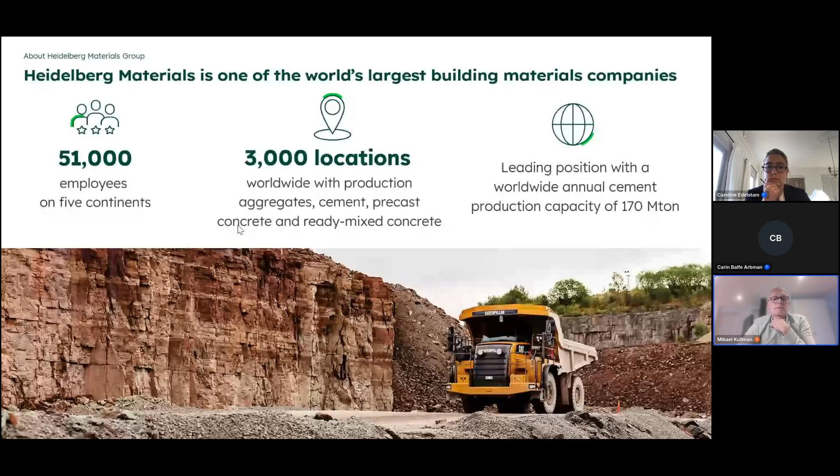As I said, we are working all over the world, but when it comes to Northern Europe, which is the area I belong to, we have activities in Norway, Sweden, and Denmark, the Scandinavian countries, including Iceland, but also the Baltic states. And when it comes to cement production, we have 4 production plants, 2 in Sweden and 2 in Norway, with a total cement production capacity of more than 4.5 million tons per year. But in my presentation here, I will actually focus on 2 locations.

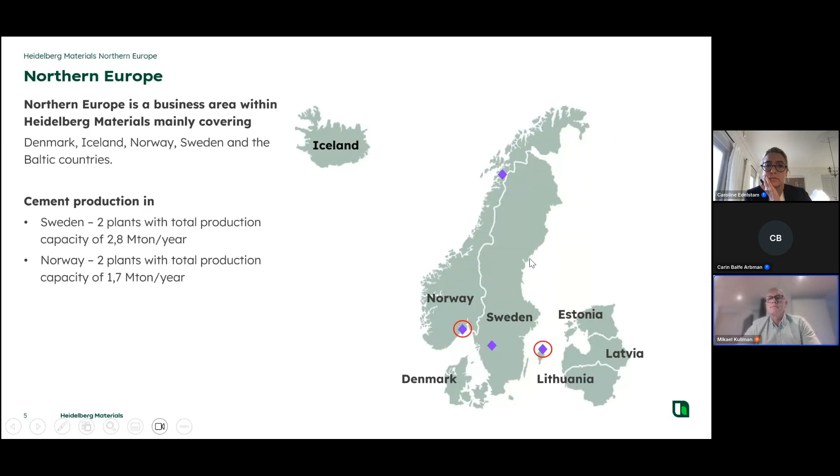One is in the Baltic Sea, which is Slite on the island of Gotland, that is Sweden. And then it's also in Norway, in Brevik, which is about 150 km south of the capital of Oslo. That is the other production site, where we are working with these CCS activities, which I will come back to later. So that was very briefly about Heidelberg Materials.

But what about the transition of the cement industry? Why is that required, and how would we do it? So first of all, when it comes to cement, how do we actually produce it? That is fairly important in the sense of why it's important for us to transform into a more climate neutral perspective: the core raw material for producing cement is limestone. More than 75% of the cement in the end consists of limestone raw material.

What we do with the limestone is that we crush it and grind it through a raw mill before we enter into the actual production, where under high heat we go through a calcination process where the limestone actually enters into what we refer to as the clinker, which is the base material for later cement production.

So we go through the calcination in the cyclone tower, as you see here in the middle, and then up to the right, we're sintering it in the kilns and then cool it down before we take the clinker, as we now call it, grinding it in the cement mill and also add some aggregates to make the actual cement and the quality that we are looking for before we store it in the cement silos prior to further transportation to our clients.

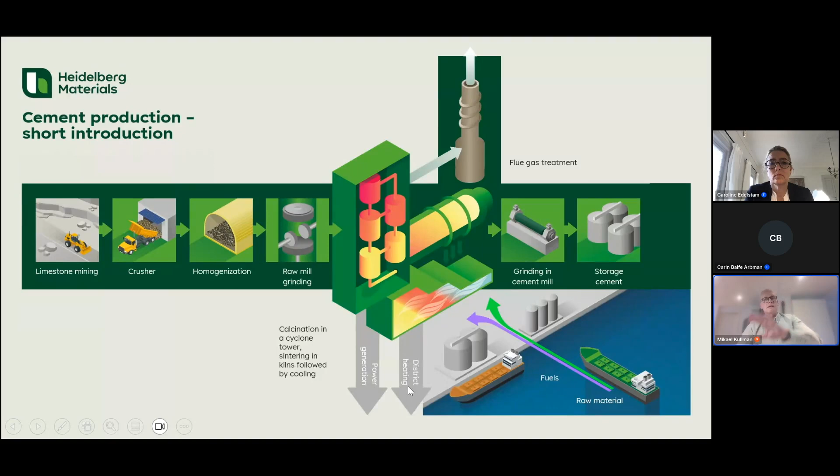But we have a problem with cement production, and that is that cement production contributes to more than 5% of the total global carbon dioxide emissions worldwide, and that is for chemical reasons. Of course, we have it from the fuels, as any combined heat and power plant has when you combust some kind of fuel. But more than 60% of the carbon dioxide emissions from cement production actually comes from the limestone.

When we heat up and produce the clinker, the limestone is actually releasing its carbon dioxide to produce the clinker and the calcium oxide, which is the cement-based product. And the carbon dioxide will then be released if we don't do anything about it. Well, we can do different things, and that is, of course, to reduce the fossil fuels. That is one way of reducing the carbon dioxide.

We can also add some further cementitious materials into the cement mix, like, for example, fly ash. We can use slag from the iron ore industry, etc. But at the end of the day, we still need limestone, a quite significant share of limestone, and thereby we cannot avoid the generation of carbon dioxide in our production. So what do we do then?

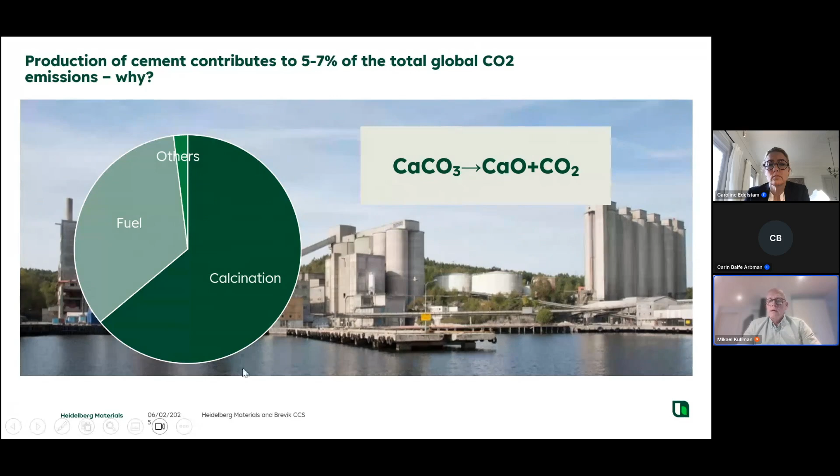After we have done all this, we then need to introduce, as you see here, some kind of capture system for the carbon capture. So we add that into the stack or chimney where the emissions previously have been released. And then we capture it, compress it, liquefy it and store it until we can transfer it to the next station, so to say, for storage. We will come back to the technologies, how we do this, in a while.

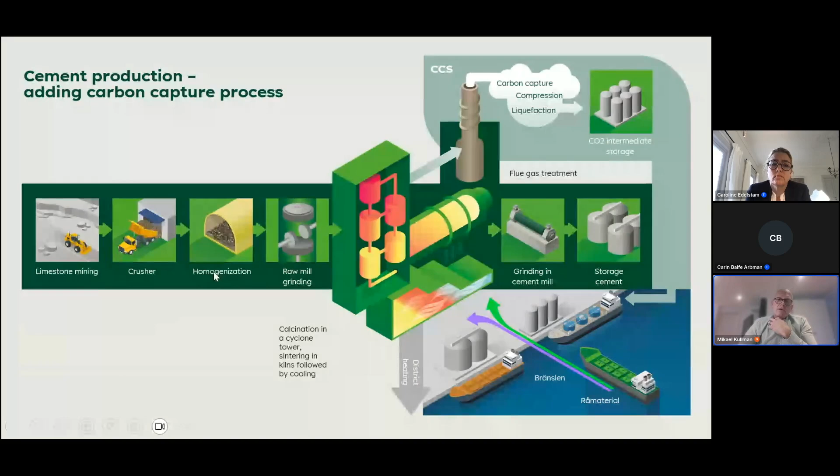Now, Slite in Sweden has been mentioned. I also mentioned Brevik in Norway. But actually, at Heidelberg Materials, we are working with this all over the world. The two projects that I will present in more detail later are the front runners. But across all of Western Europe and also North America, we have more than 10 projects currently planning for different kinds of carbon capture and storage activities.

Different sizes and different capacities, but for sure the target is there for the whole group to introduce this technology with the aim of capturing a total of 10 megatons prior to 2030. But what is even more important is that beyond 2040 and 2045 the whole group is aiming to be carbon neutral by introducing carbon capture systems in different ways.

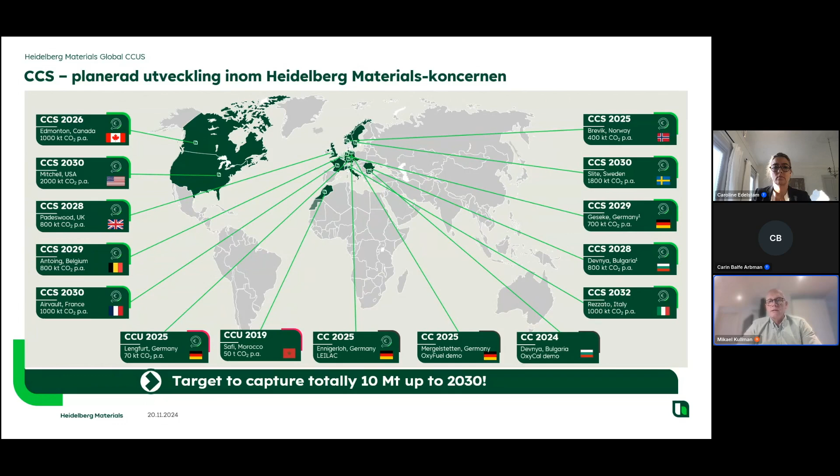So before we go into the technology that we are applying and also how it will look in the specific sites in Slite and Brevik, I would like just to have a short intro to the situation in terms of what is CCS, how do we do this, and what is actually entailed.

When we have captured it, we prepare it for transportation by liquefying it, because in gaseous form it is too voluminous. So we have to have another form before we transport it, and that we do by compressing it at very low temperature. So we can transport it either by ship over the sea to some kind of receiving terminal, or by pipeline if the infrastructure is efficient enough to do that. But that could be different depending on the locations.

The cleaned and cooled flue gases go into an absorber, which is the place where you take an amine solvent and, in a scrubber perspective, sprinkle the amine solvent over the fumes or the emissions. The amine solvent then connects to the carbon dioxide and binds the carbon dioxide, and then trickles down to the bottom of the absorber, and the rest of the emissions goes out at the top and is released as emissions.

The captured carbon dioxide with the amine solvent is then transferred to the next phase, which is the desorber. In the desorber, you heat up this amine and carbon dioxide solvent, and by the heating the carbon dioxide is released from the amine solvent. The amine solvent goes to the bottom of the desorber, and the clean carbon dioxide is transferred to the top of the desorber, and it can then be transported further.

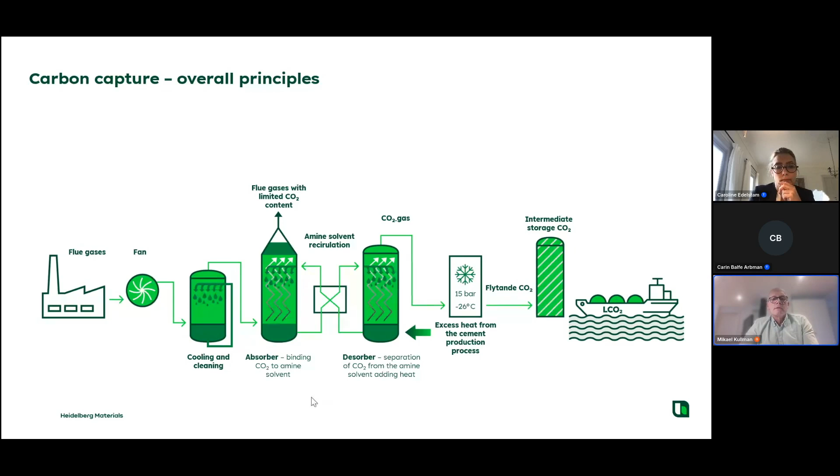This cap is, as I said before, 2,000 to 3,000 meters below the surface. It's a cap of impermeable geological formation that doesn't let the carbon dioxide release upwards. So it's a very hard rock geological formation that has been developed through the years.

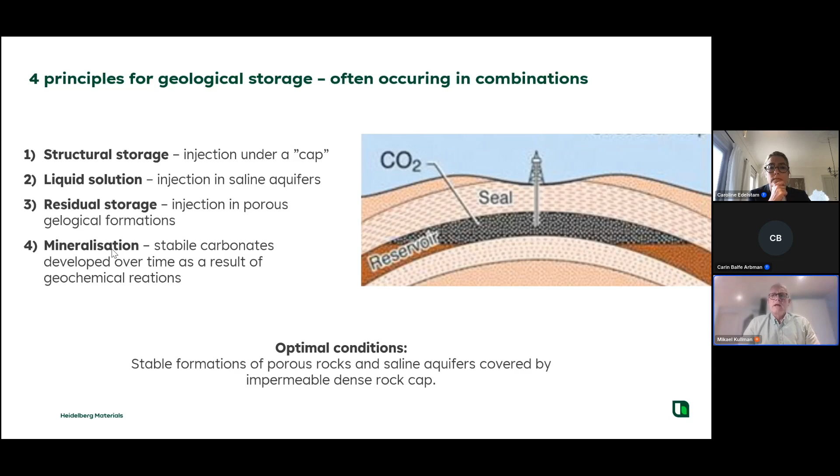But this is, as I said before, available at many places in the North Sea, as an example. When it comes to storage, you often have some questions, actually doubting: will this actually work? Will it not leak out? And that is a good question. How do we know that stored carbon dioxide is not leaking out?

But one could say that we know that because this is not actually a very new technology. We've done it for many years. When they are extracting oil and gas from the oil and gas fields, injection of carbon dioxide has been used to make the extraction of oil and gas more efficient. And then you can see that the carbon dioxide actually stayed in the gas wells, etc. So more than 300 million tons has actually been injected in that way, and thorough investigations afterwards show that the carbon dioxide remains in these caverns down below the surface.

We can also say that oil and gas from the beginning has been generated in these kinds of geological formations, and as we know, it stayed there for quite some time until we had to sort of suck it up or excavate it. So we believe that definitely the carbon dioxide will remain in these caverns for a long time, for eternity actually. But still, of course, we need to do very, very thorough investigations, both when we find the places, but also when we then finally utilize and start the injection.

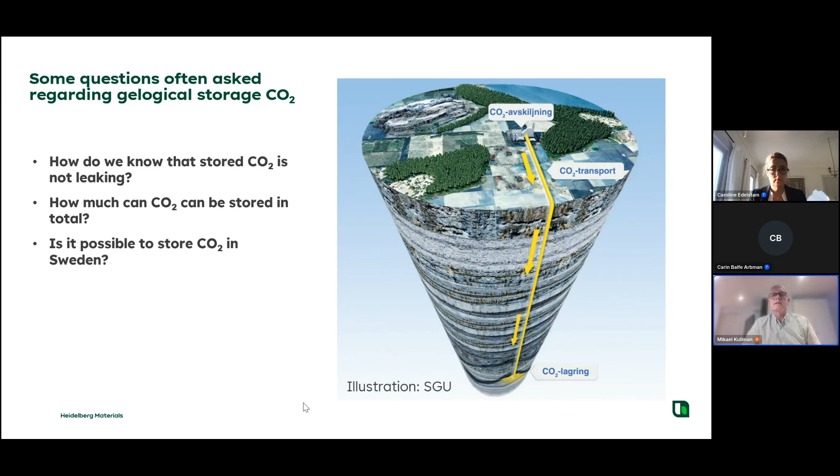I hope now that, yes, I changed the picture.

So now, more practically, what do we actually do? I will show you two projects, and that is the timeline we have in front of us. The first one is the one in Brevik that I mentioned that will be in operation now in 2025. I will present that a while, and then also go into depth with what the heading of this presentation was all about. That is Slite, what we will do there in terms of reducing the carbon dioxide emissions in Sweden by 4%. But first of all,

Brevik. It's soon to be commissioned, and here's a picture of the site itself. The plant in Brevik produces about 1.2 million tons of cement every year. When commissioned, we will capture more than 400,000 tons of carbon dioxide per year, which represents about 50% of the total emissions currently emitted from the plant. This is also part of a Norwegian government project called the Longship project, where other actors are playing in terms of the transportation and storage facility.

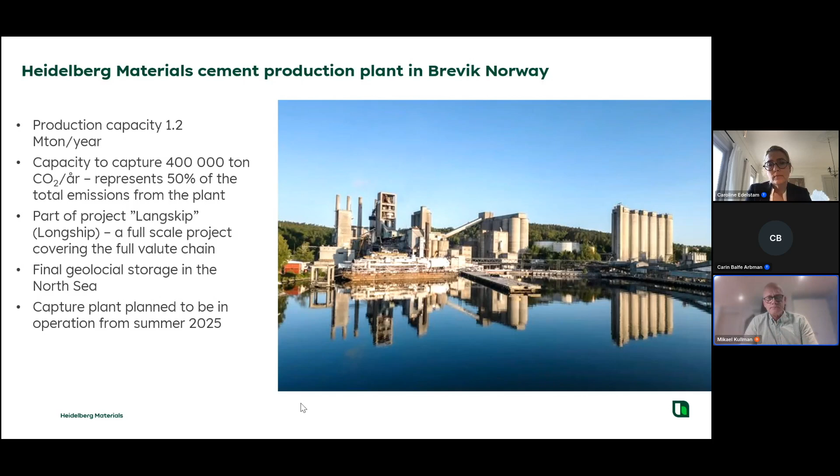And this is a picture of the Longship project, where apart from Heidelberg Materials Brevik, you also have a plant in Oslo and also one in the Netherlands, and all three are then transporting their carbon dioxide to the company called Northern Lights, to their receiving terminal for further injection in the North Sea after that.

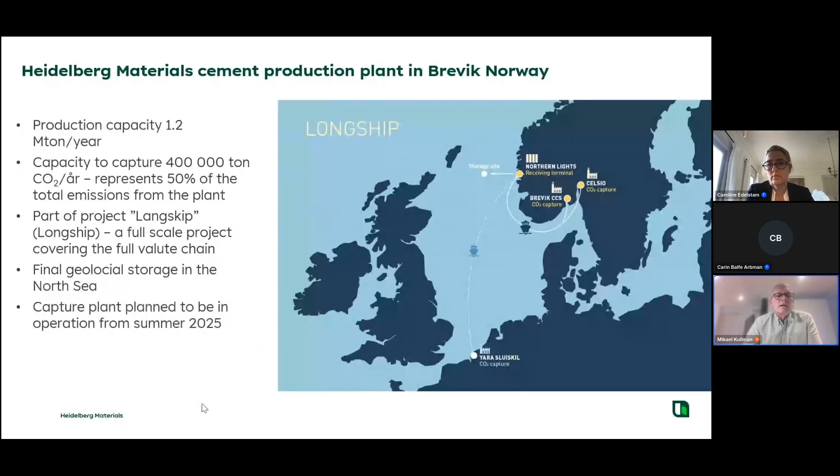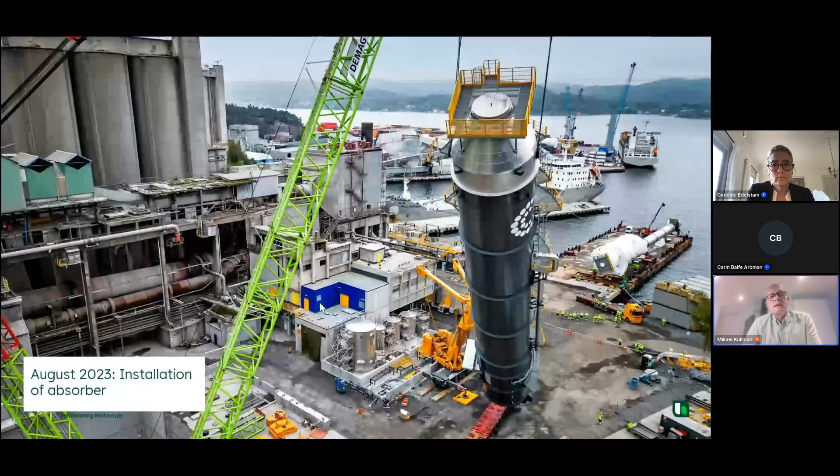So again, I said that we are starting in 25, and I will show you some pictures of what's happening here. This was already in August 23. Here you have the absorber that I mentioned to you before. This one is about 60 meters long, and it's produced in one piece and then transported to the site, and there you see it's lifted up. You also see here in mid 2024 the last heavy lift.

And why do we have heavy lift? That is because while we're introducing the carbon capture activities, the cement plant has to be running at the same time. So most of the equipment is actually produced in a modularized system in other places and then transported to the site and then lifted and installed during short shutdowns when these parts can be implemented.

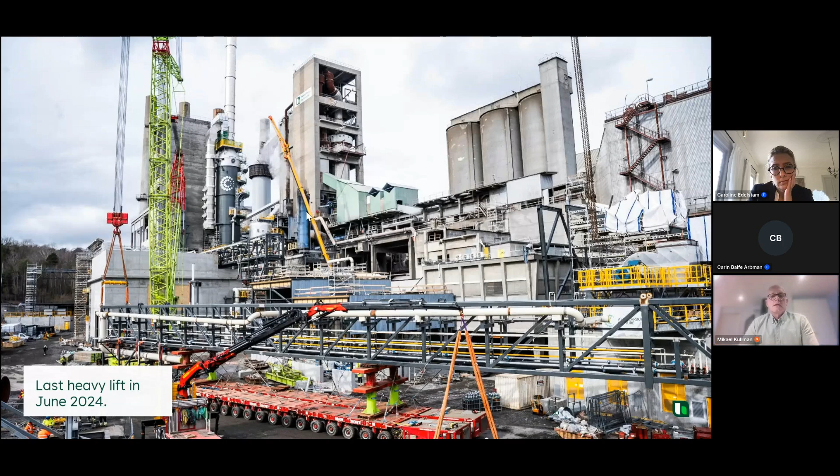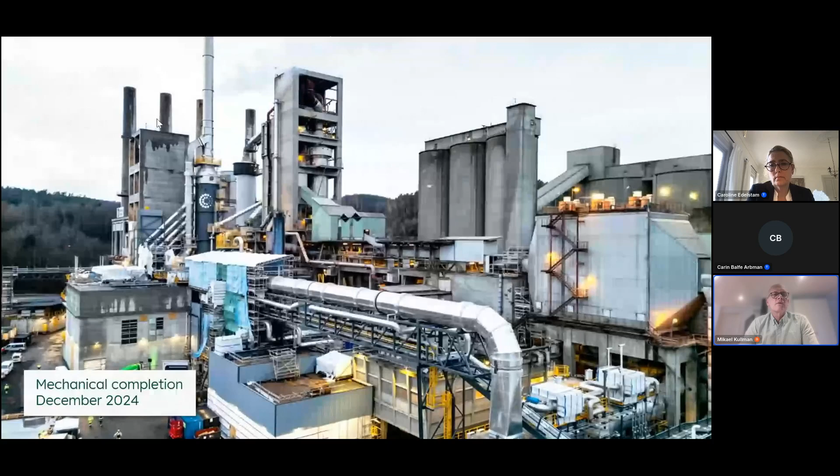So, and the final picture here is actually in December 24. It's a bit tricky to see here, but when we had mechanical completion, you see the shining part is a new part, and then you also see in the back here the absorber and the chimney itself also on top of that one. And then also in the harbor at the same place, we have the intermediate storage. These are 6 tanks of about 800 cubic meters each. They're quite big, as you see, but that's where it's intermediately stored.

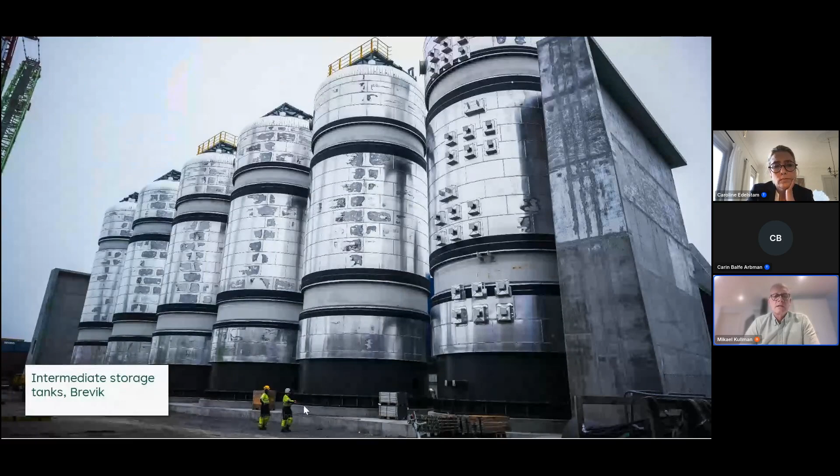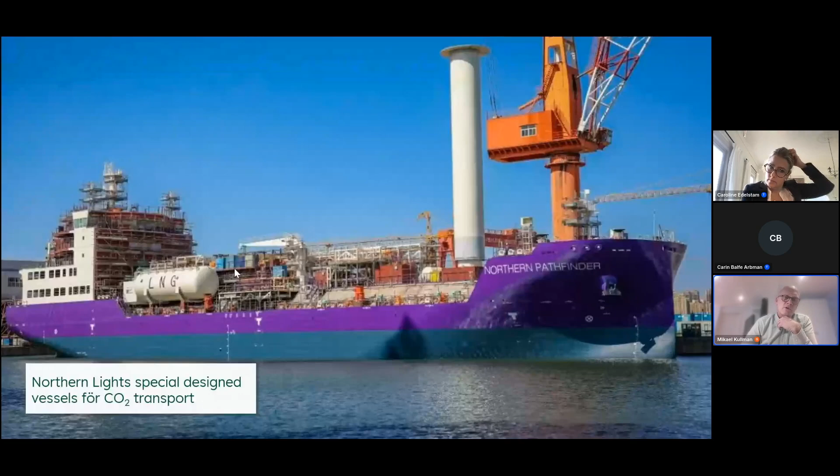So what is the Slite CCS project all about then? I mentioned Brevik, that was about 400,000 tons, but in Slite we will capture more than 1.8 million tons of carbon dioxide every year. And the major difference with Slite is that we will capture as much as possible. We aim for more than 95% of the carbon dioxide that is emitted today to be captured and stored tomorrow. And thereby we also need to introduce a lot of new activities when it comes to heat recovery units, energy generation, etc. But still it will be electrified to full extent. In terms of size, it's unprecedented in the cement industry. So this is the largest cement industry carbon capture project currently in planning.

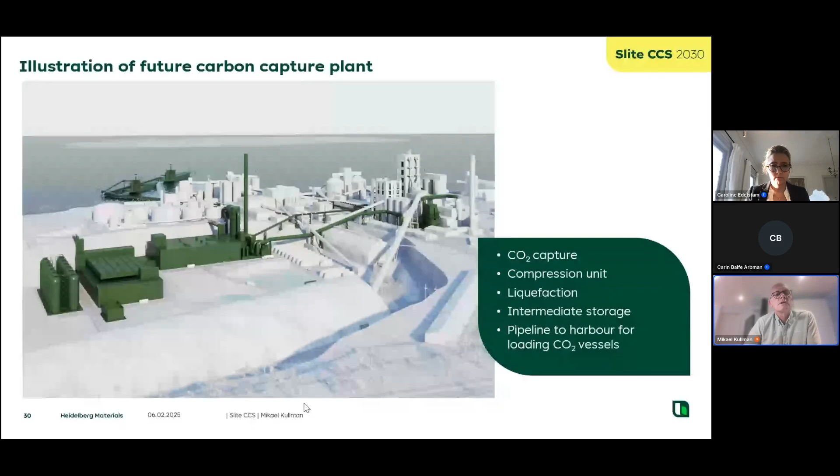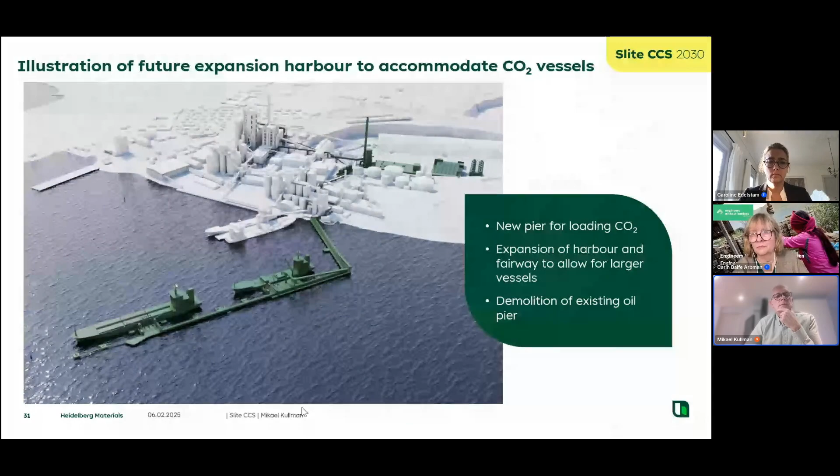And then in the end, you have the pipeline to the harbor, and you also see the vessel and the harbor in the water. And here you have from another angle a new pier, and we also have to extend the whole harbor to allow for these larger vessels to accommodate an efficient transportation of the carbon dioxide. So this is what will happen in the future. Again, this is an illustration, but we believe that it will actually look like this in the future, because we are coming quite far in our planning.

And finally, as I said before, for the carbon dioxide storage we are looking at different alternatives. We may use the same as Brevik, but there are also other alternatives, both in Norway and Denmark, and even onshore Denmark are possibilities that are now coming up as a very, very interesting opportunity. That is actually what I was planning to present to you.